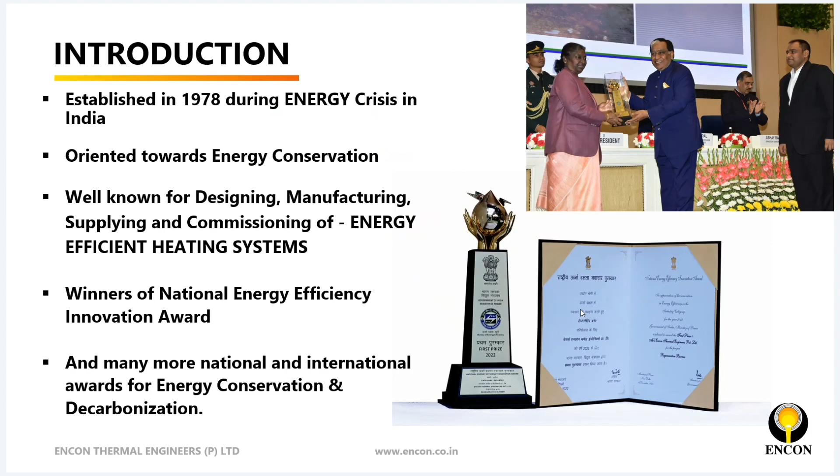Next slide please. So currently we are serving steel plants in a big way - almost all the big steel plants in the country, and West Asia onwards till Southeast Asia.

Today, most of the machinery in SMS sections and somewhere in other forming sections also are done by ENCON. Getting these technologies or equipment accepted is in itself a big challenge, because in MECON we found that...

When we gave to RSP - I'm giving you a bit of history, going a little sidetracks. That will be good for the industry, because we should know how to fight the system. If you fight the system, you can win the system. Otherwise, you don't win the system.

MECON had a separate list of preferred makes for Indian suppliers and for foreign suppliers, and their evaluating styles were also different. That's why most of the time the Make in India story was not very successful at the start, once Make in India was started some 10 years back. People were not accepting it, until we had a good interaction with the highest level - the chairman and managing director of MECON was very receptive to all these things, and we got all Indian developed technologies accepted there. That's how we are in all the steel plants, foundries.

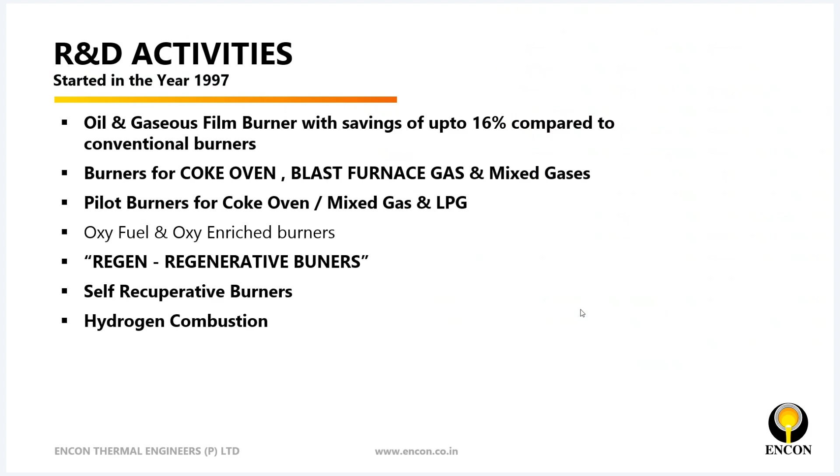Can you go to the next, please? Next, please, Bhavna. So let's go to the next. We have discussed this. Let's go to BHEL straight, please. Or you're going other way around. Yeah. Let's go. So let's go, there should be a video on this. Let's go to the next, please.

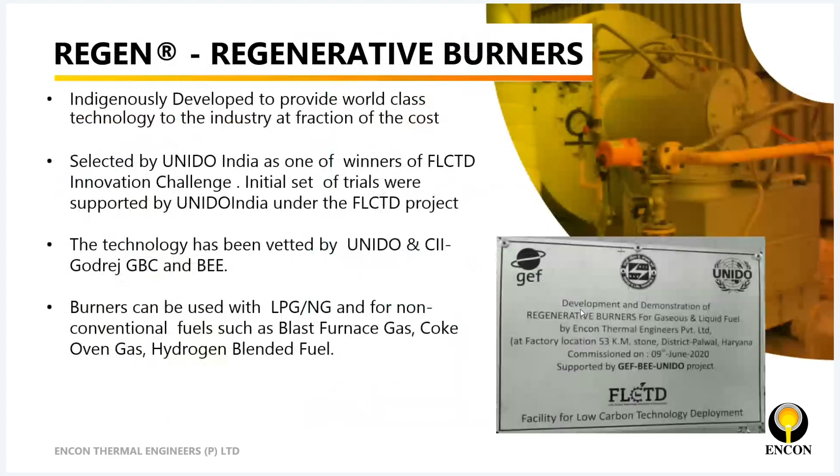Let me show you a video on what a regenerative is. Or if you all know what a regenerative is, then I need not show anything to you. So then I'll go straight away to BHEL. So shall we? We need to see this. You need to see this.

Okay, fine. So can you go a slide down? There is a video on that. One or two more slides down. Yeah, this one. If you click this, yeah.

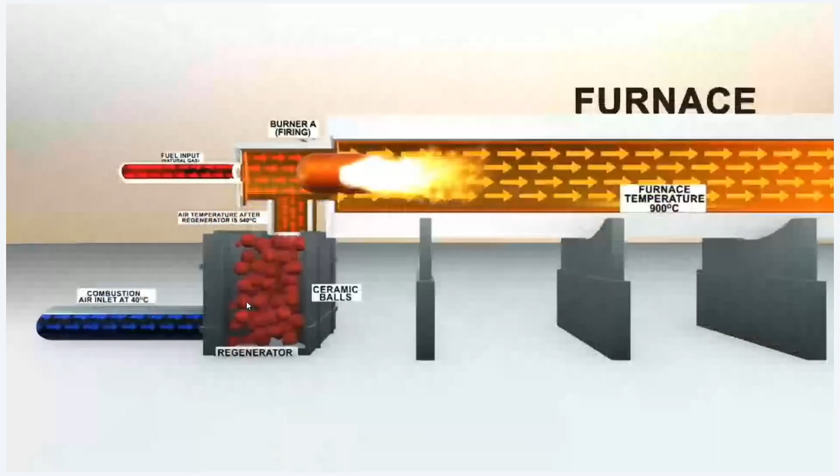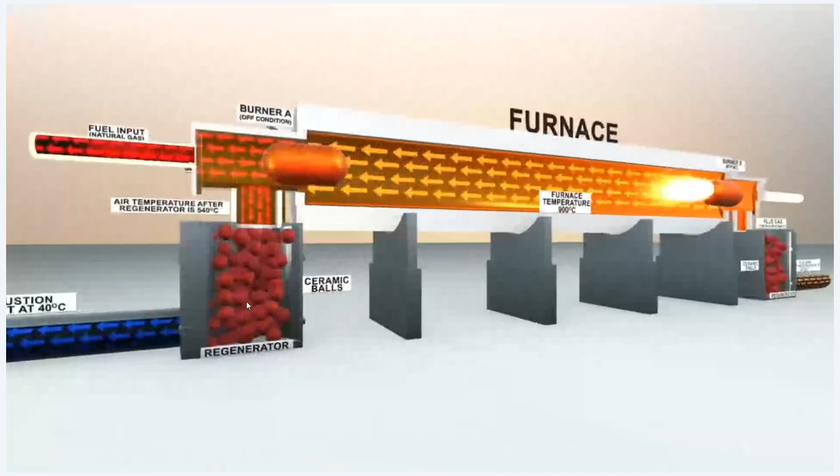Burner and regenerator with ceramic media balls. Regenerative burners operate in pairs. In a typical cycle, first burner A will fire and burner B will act as a regenerator, absorbing heat from the exhaust, which gets stored in the ceramic balls. The stored heat gets transferred to air when burner B starts firing.

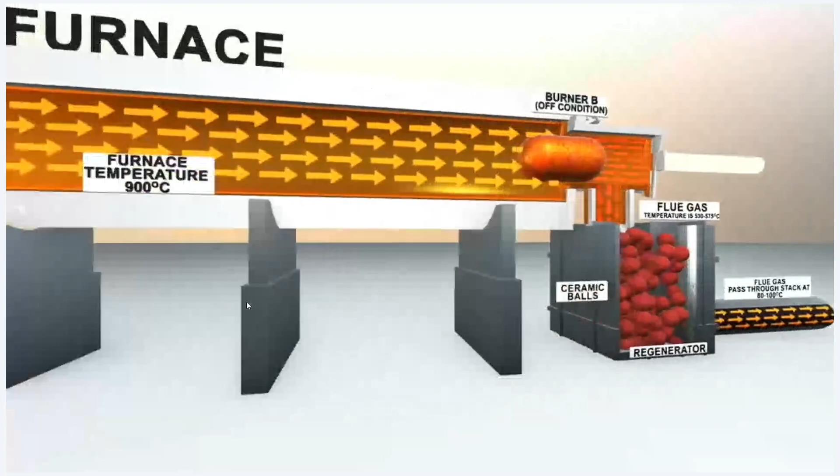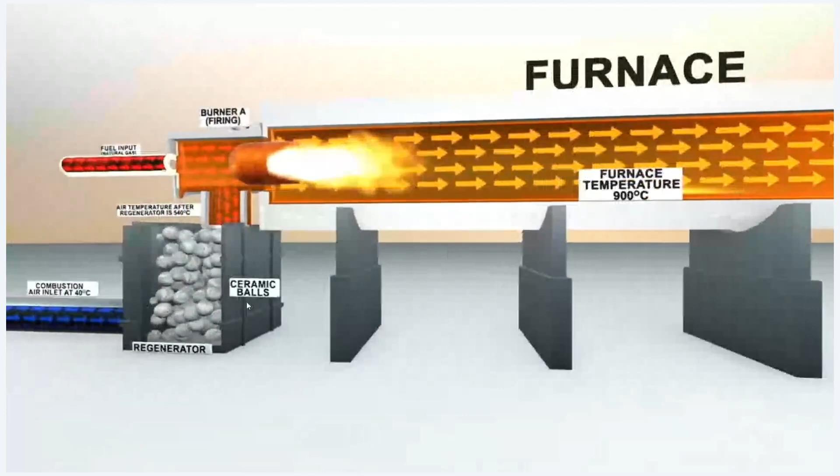The furnace was tested with multiple cycle times ranging from 60 to 180 seconds, keeping the furnace temperature at 900 degrees Celsius. Energy recovery of 86% was achieved through exhaust gases, which resulted in reduction in fuel consumption.

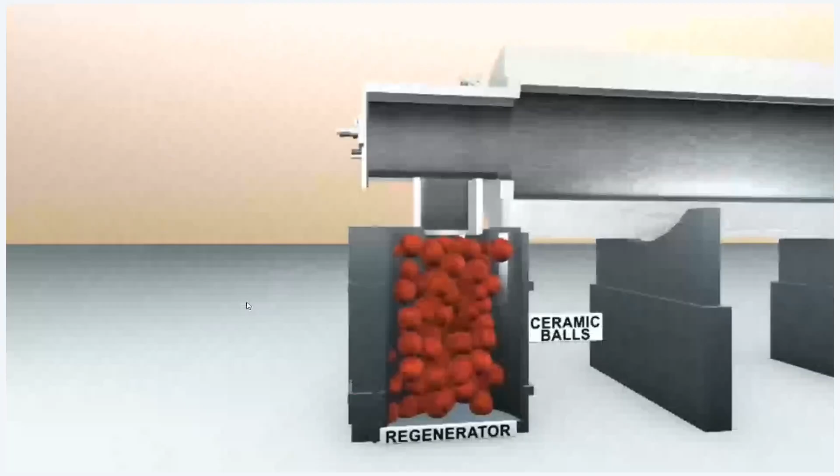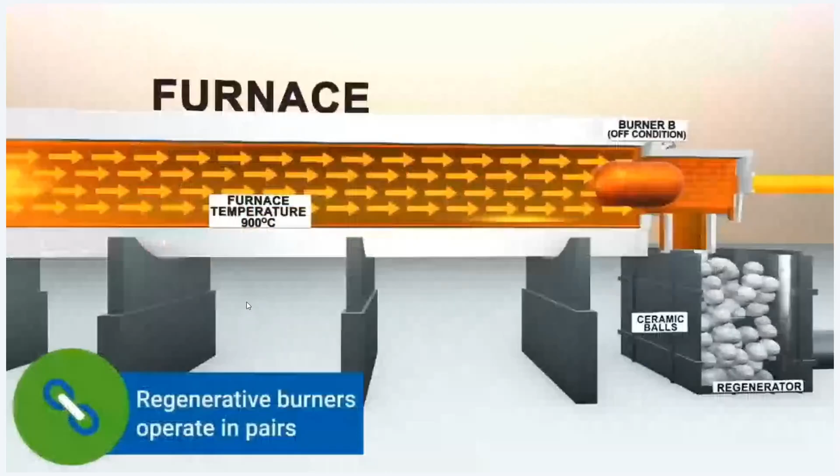Regenerative burners can recover up to 80% of heat from the exhaust gases and use it to heat up the incoming combustion air, maintain a superior temperature profile in the furnace, and reduce fuel consumption. Regenerative burners operate in pairs and work on the principle of short-term heat storage in the regenerator, which is attached to each burner, thus eliminating the need of conventional recuperators.

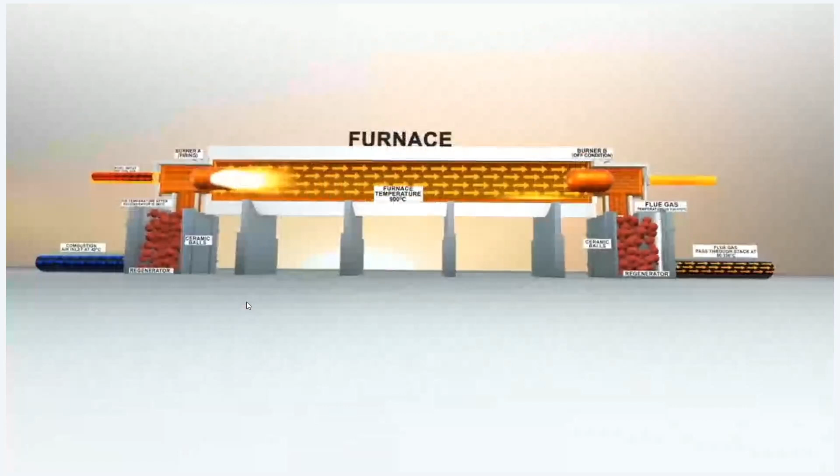A regenerative burner consists of a burner...

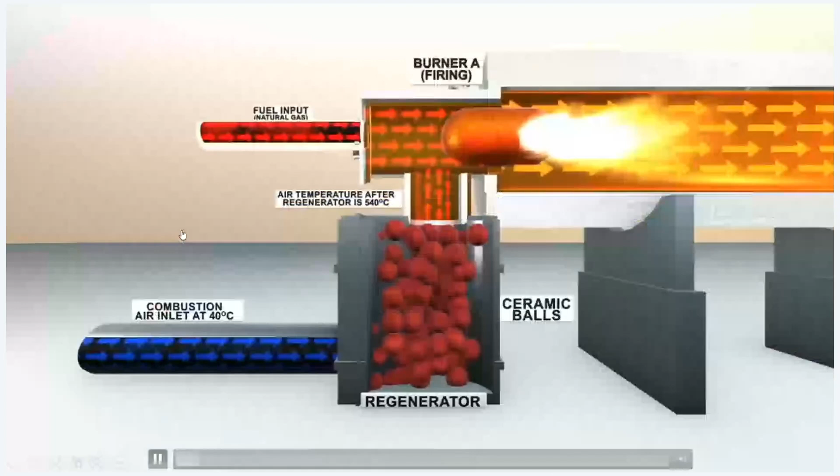Okay, so if you go to the slide now, the earlier slides, then I can explain you in slides also. Previous, yeah. So here you see, this is always the system comes in. Yeah, one more previous, please.

Correct, so here you see burner A is firing. The whole system comes in a pair always. In any given furnace, you will have a pair working for it. So if it's a small furnace, you can have a set of one pair, or if you have a bigger furnace, we can have multiple burners. Like in BHEL, the maximum what we have done is 5 pairs for a 120 ton furnace. So we have done furnaces from 30 tons to 120 tons, and all work in pairs.

So here what you see is when burner A is firing, all the combustion air, the fuel, everything goes through burner A, and all the flue gases exhaust through burner B, and the medium lying there, the ceramic balls in burner B, which is slightly yellowish, gets preheated with the atmospheric temperature of the utility. If the utility is at 1200 degrees centigrade, the balls get heated almost to the same temperature.

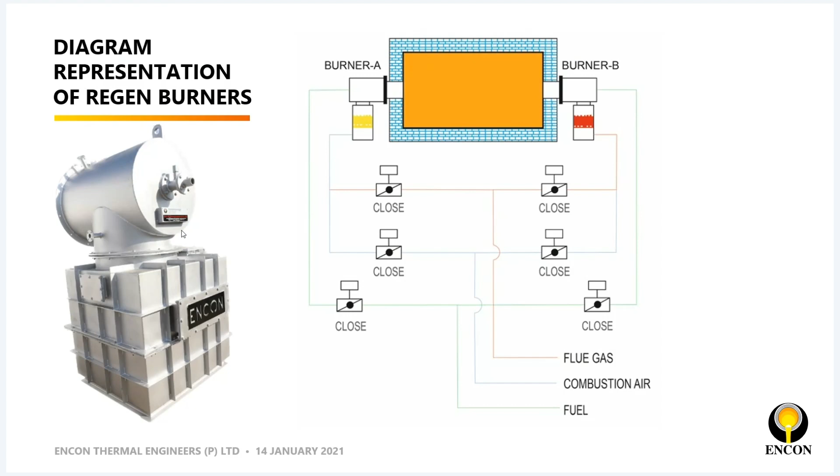Now the burner B starts firing, and the combustion air, which was going through burner A, is now going through the medium of burner B. Now, burner B medium, as I mentioned earlier, was lying at 1200 degrees centigrade. It recovers around 1000 degrees from here and gives it back to the furnace as preheated combustion air.

Thing to note here is, in recuperators, we can go up to 300, 400, 500 also - high performance recuperators. But for high performance recuperators, if you go anything beyond 400, since steel becomes plastic, you have to go for stainless steel, and then you have to go for lagging also. The resultant factor is much, much lesser.

Whereas in a regenerator, you don't have to do any of such things. Here it's ceramic balls straight away preheating the combustion air, going straight into the burner. So everything is direct. You don't have anything going indirectly or traveling through the pipe, or managing pipe losses, or taking care of expansion because of the heat. The pipe size has to be much higher for recuperators.

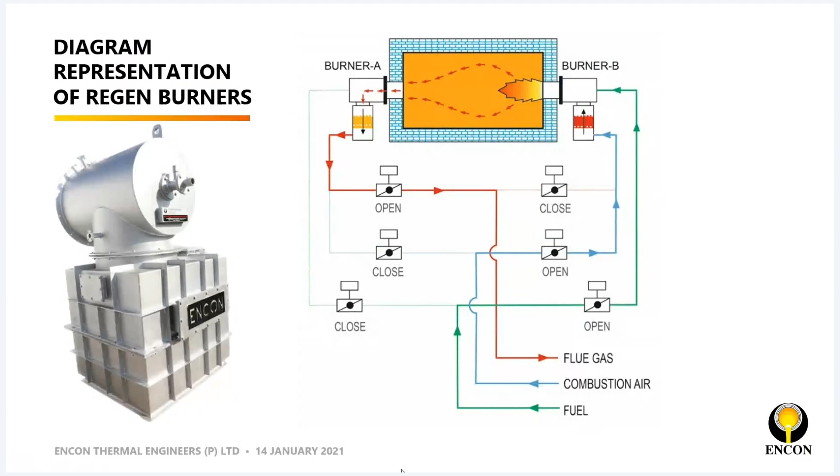So now coming to the performance, let me show you the next slide. Is anybody having any question, please? We are having a lot of noise from the back. You may have questions, so you can put your question. Let's go to the next one please, Bhavna. Next, please.

Okay, this is now what happened in BHEL. If you see serial number 1, the furnace capacity was 30 metric tons. It was a 6-meter long furnace. We gave 3 pairs of 1500 kilowatts each. Status: the furnace was handed over on 15th October. Handed over means after 6 months of successful running. So the average energy saving was 35%.

Now furnace number 2, it's a 10 meters long furnace, 70 tons capacity, 1500 kilowatt, 4 pairs were given, and the energy savings established was 40.31%. That was on 23rd of July.

This is all signed. Then the next furnace again was 120 tons, but length was the same, and the number of firing burners were 5 pairs instead of 4 pairs as above. Again, the savings was around 40%.

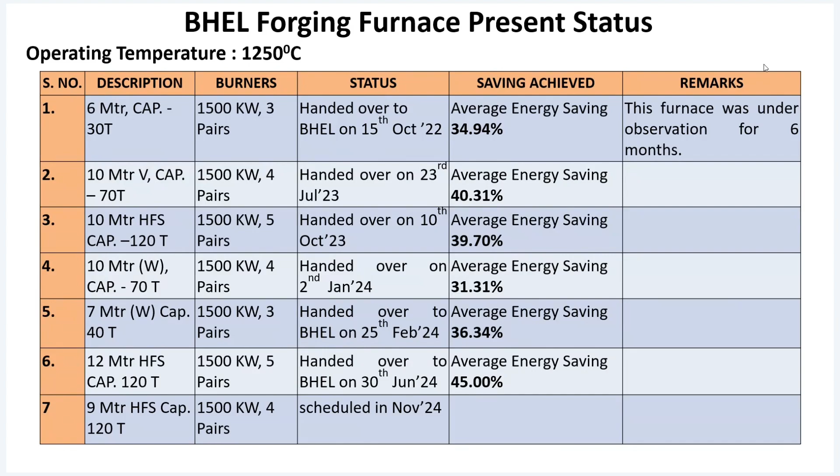Thank you. Okay, so we were at 45% saving. I wanted to show you some before and after pictures. If we go to the next slides, we'll have that. Yeah, this is savings - earlier they had standalone burners in their furnace at BHEL, with separate air lines and everything separate.

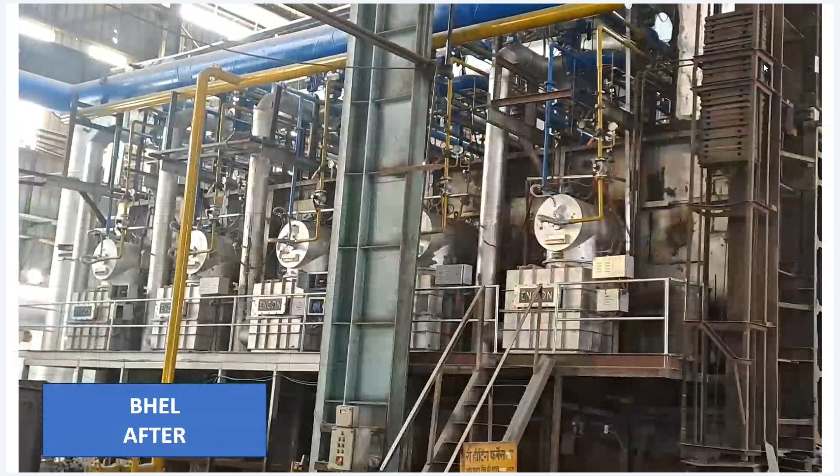And then if we go to the next one, we'll come to know. Now here you see, those burners - 18 number of burners were replaced by 5 pairs of burners, like 10 burners. So this is what the regenerators brought in. So this is before and after.

Can you go to the next, please? Yeah. So this is all controlled by PLCs, and these are some of the results if you want to see.

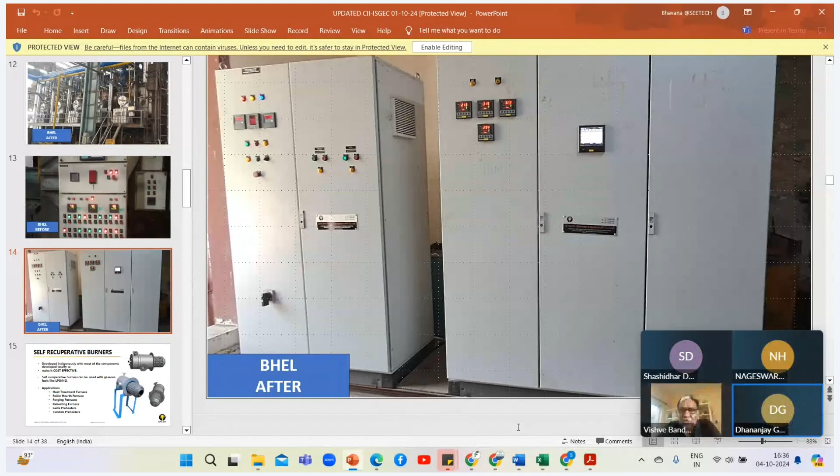Yes, okay. So this is the BHEL control panel, and the earlier one I showed you had individual burners controlled through PID and similar methods, but this one is entirely through PLC, 100% PLCs.

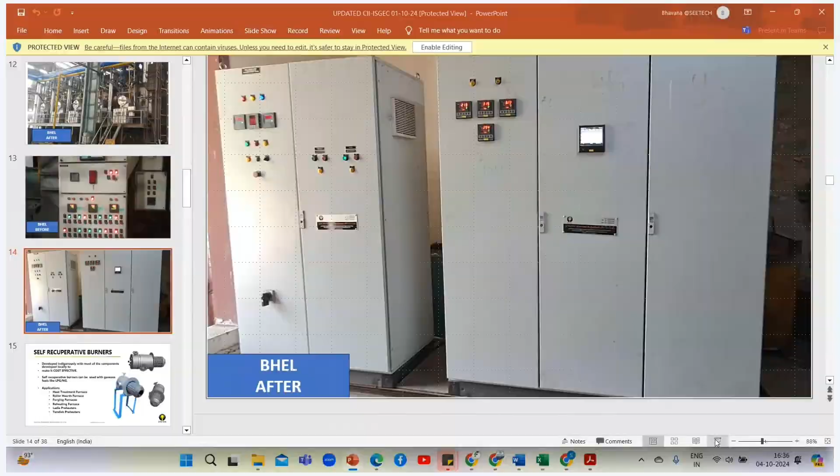There are around 72 operations in a minute which a burner has to go through, or maybe more, I'm not certain on the exact numbers. But everything is done by PLC - all valve opening and closing, temperature monitoring, pressure monitoring, everything is handled by PLCs. These furnaces are maintained at around 2% oxygen, and all oxygen controls are also done by them.

And for pressure, again, we ensure it's not more than atmospheric plus 2. So this is what we do in these furnaces.

Can we go to the next slide, Bhavna ji? So this is the self-recuperative burners that we have developed.

Now this is where the furnaces are smaller, in the western region - Pune, Ahmednagar areas. There are many furnaces which are standalone with single burners. Here you have recovery up to a temperature application of 1000 degrees. We have established a saving of around 600 degrees recovery there - 600 degrees is recovered back. So in these burners, this burner in itself is firing and it's a recuperator also.

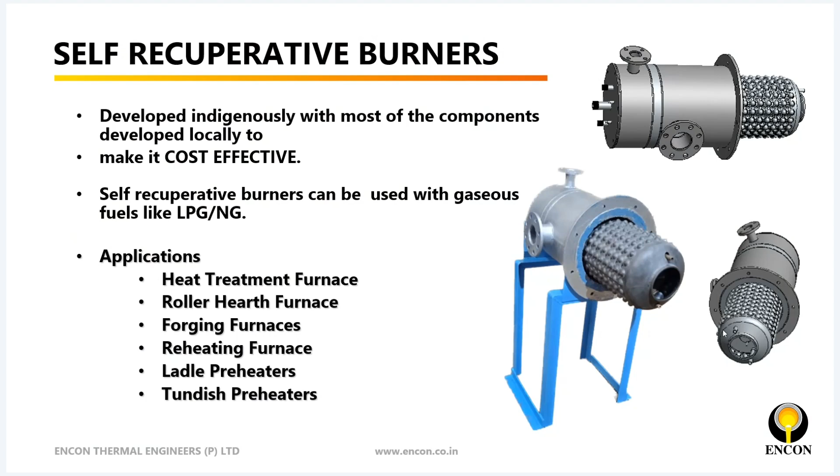So self-recuperative burners, that's what we have developed, so we came up with this. Next, please. So where you cannot... let's go to the next one, please. There's too much theory here.

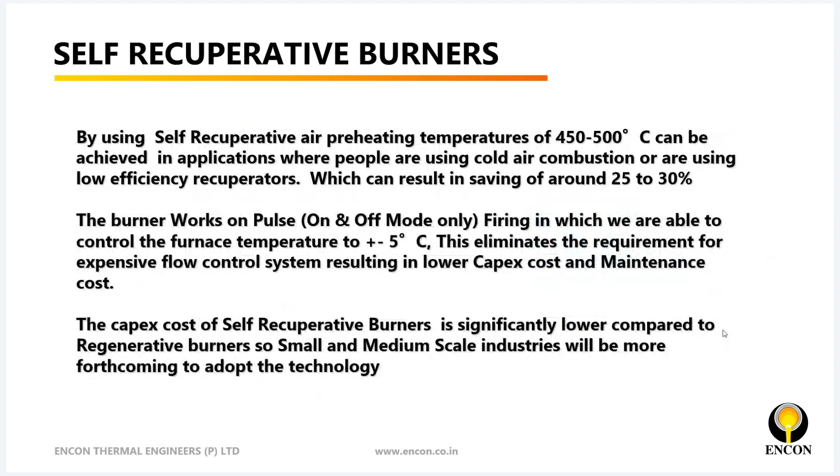So that's the principle of how it works. There's combustion air, and the combustion air is routed through the body of the burner through the sleeves outside, and gets preheated to a temperature of around 450 up to 500 degrees centigrade. We have been doing it this way.

So this is where you can't use regenerators - self-recuperative is a very, very good answer. This is what we developed for them, and the capex is also much lower in comparison to regenerative burners. Next, please.

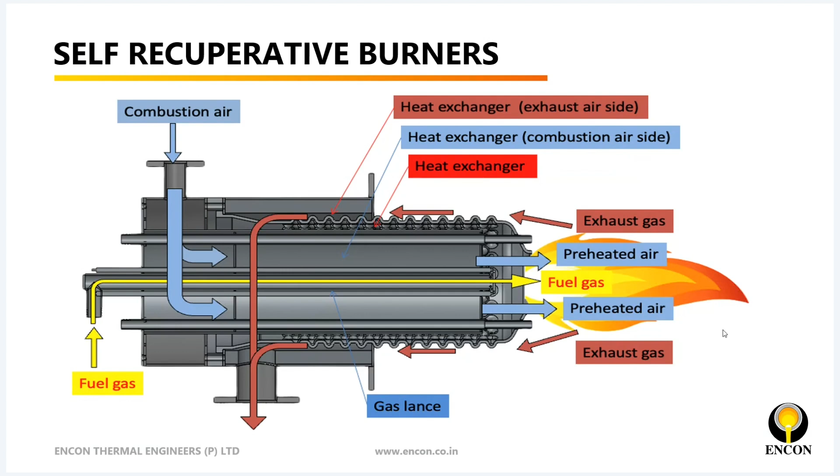So yeah, one point - this is what you see at our test furnaces. Whatever technologies we bring in, this is after 2 years of testing, in whichever way. So I'd like to invite each and every one of you to visit all these R&D centers, R&D facilities at our place.

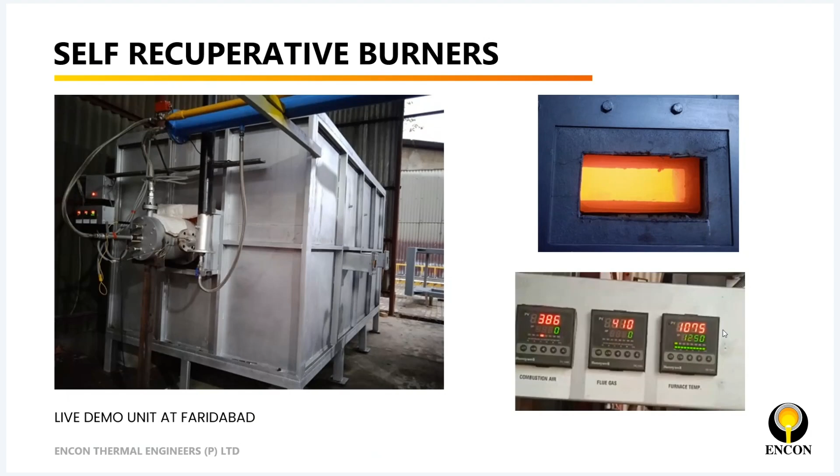So you can see this - this is a self-recuperator burner running, it's functioning, you can see everything. And if we go to the next slide, Bhavna, we'll see even the regenerative burner is also at our place. I'm not going into oxy-fuel consumption. Let's go to the next slide, please.

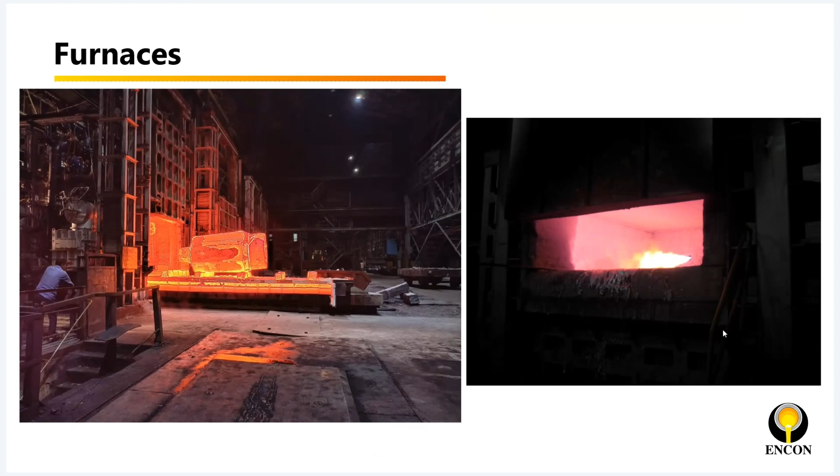And this is the flame length shown for a self-recuperator, but it can be much shortened too. This is a bigger capacity burner, maybe 300 kilowatts, but for 200, the flame will be much sharper and much bluer. Next, please.

We are showing other systems we make, like ladle heating stations, for the mother machineries of all the SMS sections of the Indian steel industry—be it Jindal, Tata, SAIL, or neighboring countries like Bangladesh, Myanmar, Southeast Asia or Central Asia. We supply to all of these.

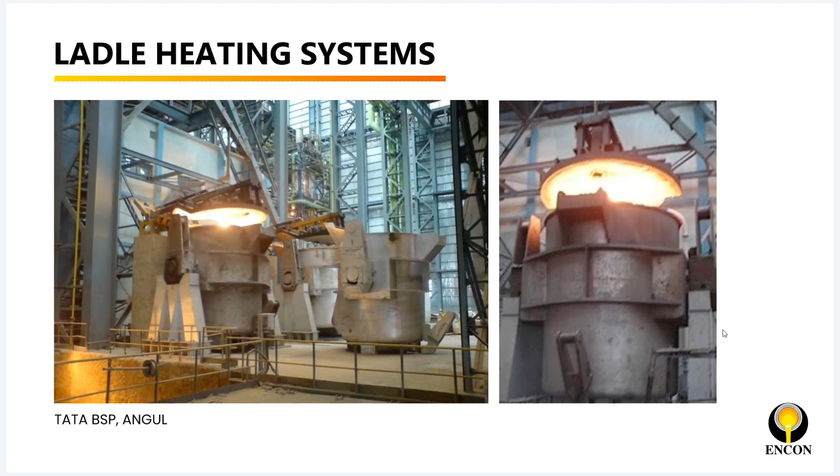Please, can we see the other slides? Let me check if there's something interesting to tell them. Yeah, this is interesting—shall we go one slide back?

This is a recuperative ladle heating station for 50 tons and above ladle heaters. We have established savings of around 25 to 40% on current consumption if you use this system, recuperate the gases properly, and seal the top cover of the ladles well.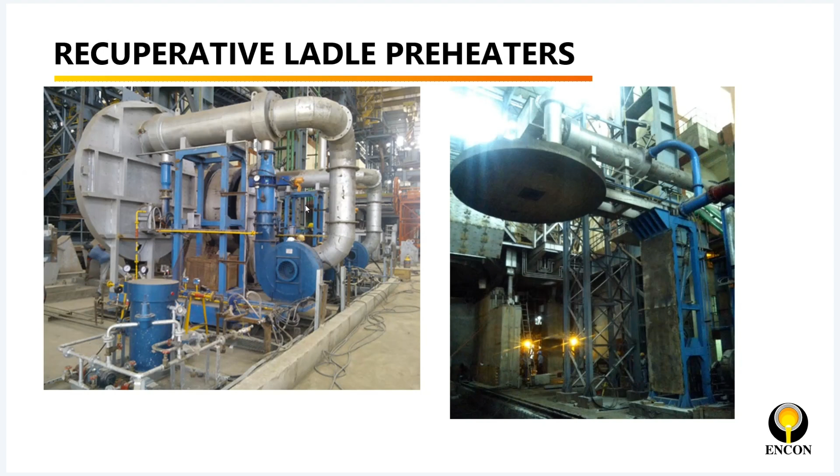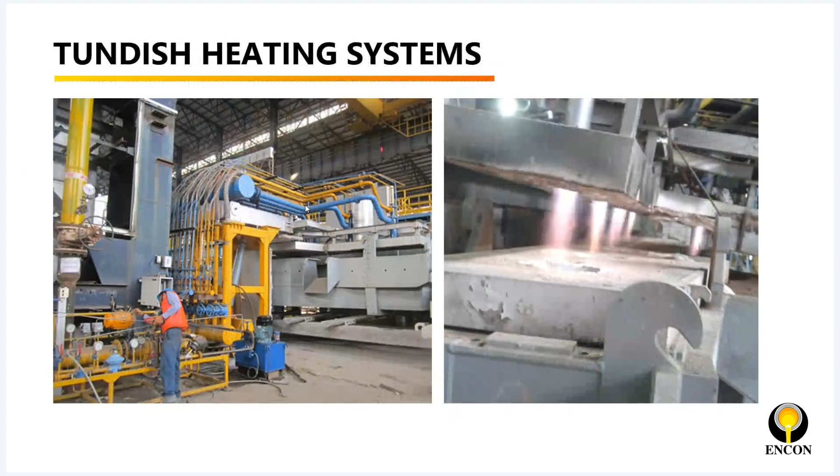So you can see, these are tundish heating systems. Can we go through the next ones please? These are launder or scrap reheaters, also tundishes—please keep going.

I think let's have questions now. We have the last 10 minutes left—let's go to the next one.

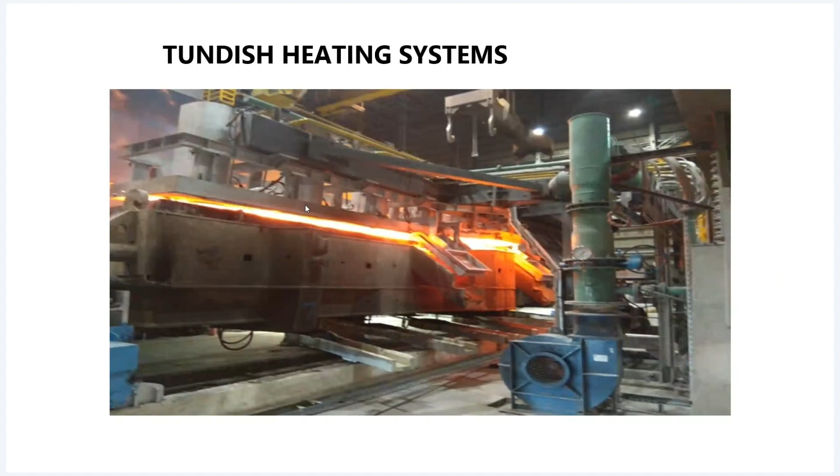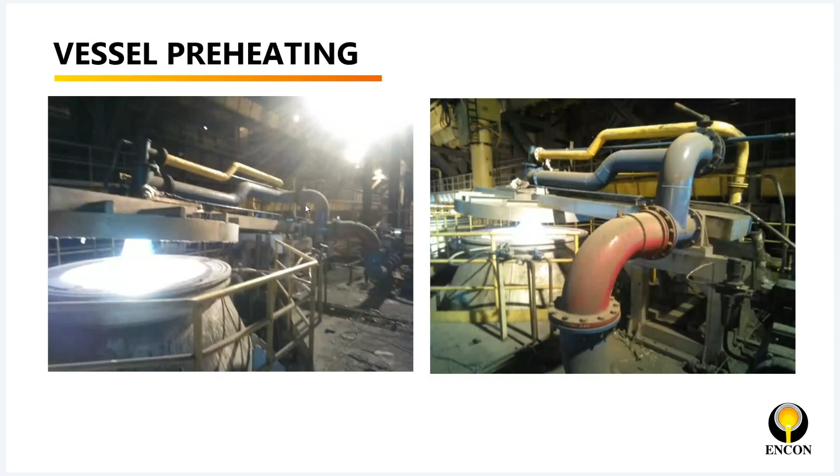This is one of the largest—an oxy-fuel burner for a vessel preheater, 7.5 meters. This was earlier Bhushan, now it's Tata, BSP. Next please, just to show you what all we are doing.

Oxy-fuel burner means 100% oxygen, no air at all—yes, 100% oxygen.

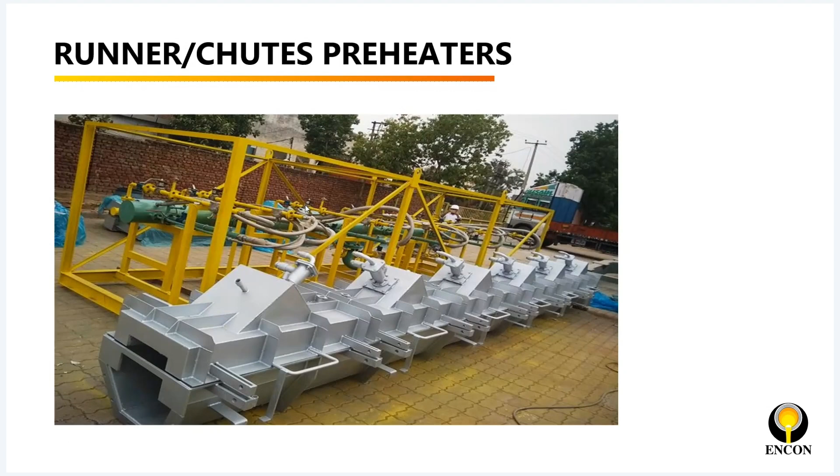These are very common recuperators. Since this slide was made for CII Hyderabad, where we had a presentation just now, we got the National Award for Most Innovative Technology. This presentation was made there, and I'm sending the same.

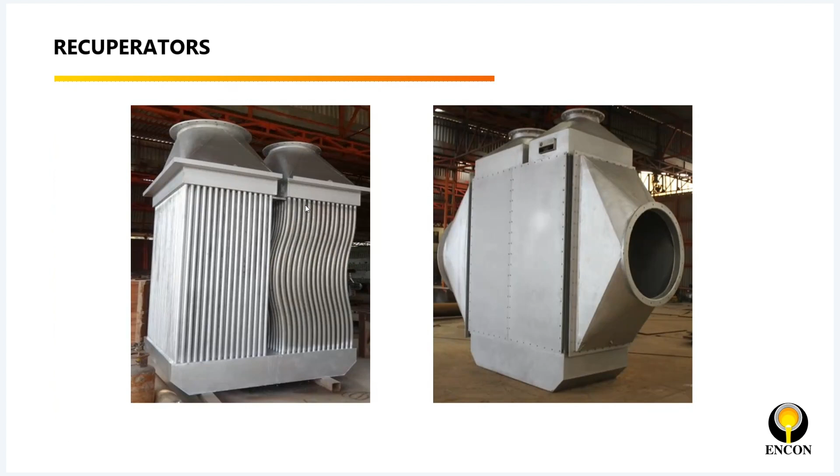Can we go to the next please? We can have questions now—it's already 50 minutes, last 10 minutes are there.

So these are some burners we are doing—around 12 or 13 kinds of different burners, mixed fuels, low like BF gas. We are also doing burners with BF gas, oxy-enriched, dual fuel burners, coke oven burners. If you have any very specific requirements, let us know—we can always develop a burner for that.

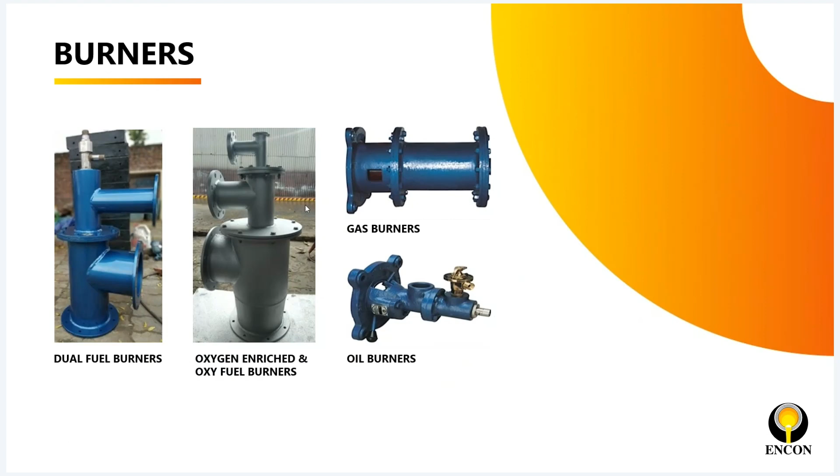Next please, because this was not the subject today—let's go to the next please.

Yes, so thank you very much sir. Thank you very much.

Please hold on, please hold on this slide. Sure sir, so in the meantime, if you have any more questions, you may please put it.